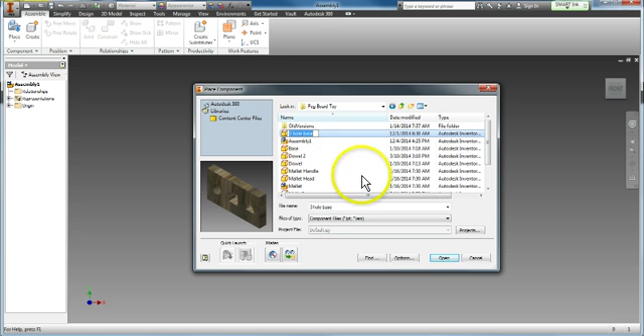So here's my Pegboard Toy folder, and I'm going to find my parts that I need. So I need a base. I'll double click on my 3-hole base and open that up. It's going to look really big, so I'll click one time and it'll zoom out. I'll click escape on the keyboard, and now I can zoom out and see I have my base placed.

After that, I'm going to go back to Place and find my side. I'll scroll down, here's my side piece, and open up the side. I'm going to place one over here and one over there, so I place 2 sides, then click escape on the keyboard.

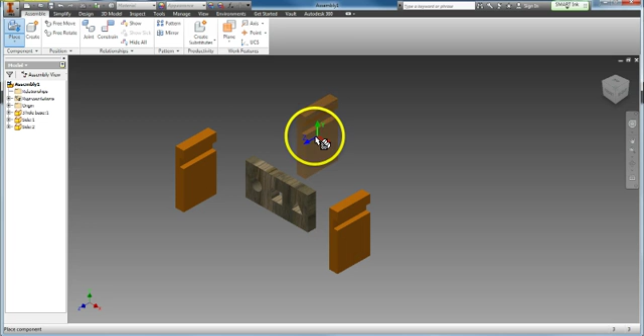Now I'm going to put those 3 pieces together. Right now you can see they move independently from each other, they're all different. To start, I'll click on the Constrain button up here. Constrain means give a sort of rule, a guideline to follow on movement, it's going to restrict the movement.

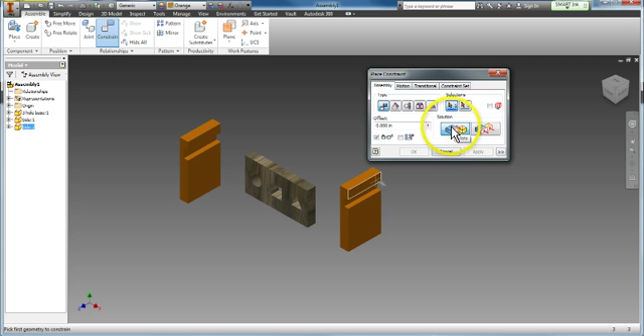To start, the first button I have here is Mate. I'll select the mate function, I'm going to call this the glue button, it's going to glue 2 surfaces together. So I'm going to glue the end of my board, making sure I click the end surface right here, click once there, then zoom in into the end of this notch. So those are the 2 surfaces that are going to be glued together. I'll glue them together, and then click Apply.

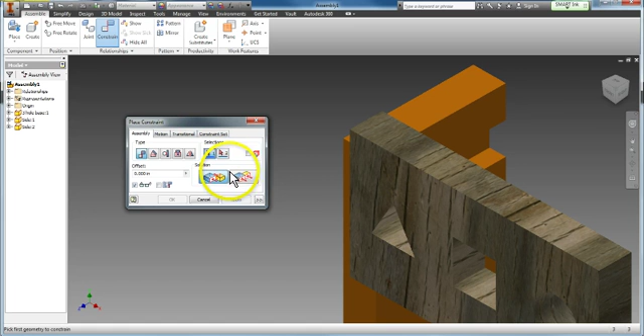Now it looks kind of funny right now, but that's fine, move it off to the side. Now those 2 surfaces are glued together. Next I'm going to select this option over here, called Flush, and flush means make 2 surfaces even. I select the flush option, and make even this long edge of my base and this edge of my side. Click those 2, click Apply, then close out of here.

Now you can see I can move this around, up and down. I can't move it in and out, it just moves up and down. It's constrained on those 2 axes.

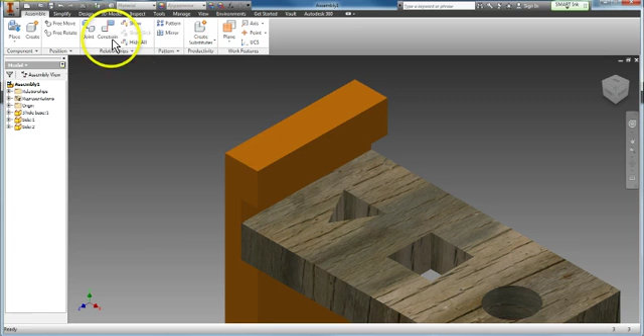Now, next constraint I need to do: go back to Constrain, make sure we're on the mate, or glue, function. I'm going to mate this top surface. I'll select my Free Orbit tool and rotate around very slowly, then mate it to this surface right here, that's where I want it to be glued to. Click Apply.

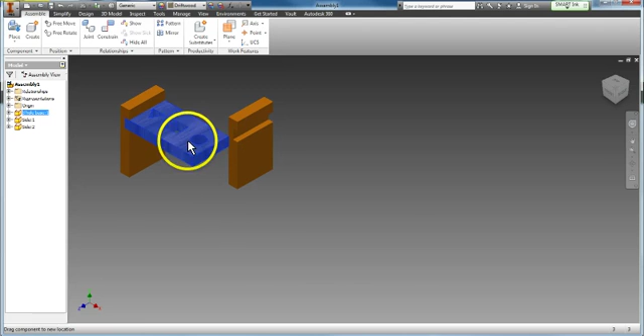I'm going to go back to my home view, and now you can see that when I move this, the base, the side, moves with it. So now I'm going to repeat that same process for my other side. Constrain, move that off to the side.

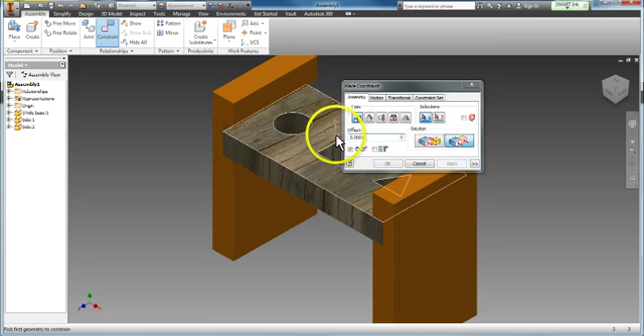I'm going to glue the end of this surface into this notch. Make sure you select that flat surface, do not select the edge. Select the flat surface, glue those together. Click apply. Flush tool. I'm going to flush the side of my side and the side of my base. Apply that, and now I'm going to move my base down a little bit.

I'm going to go back to constrain. I'm going to glue this surface. I'm going to rotate around with the free orbit tool, spin this up so I can see what I want to glue it to. I want to glue it to this piece right here. Click that surface and then apply. Close out of my constrain window, go back to my home view. Now when I move this, it moves all as one. Those pieces are constrained together.

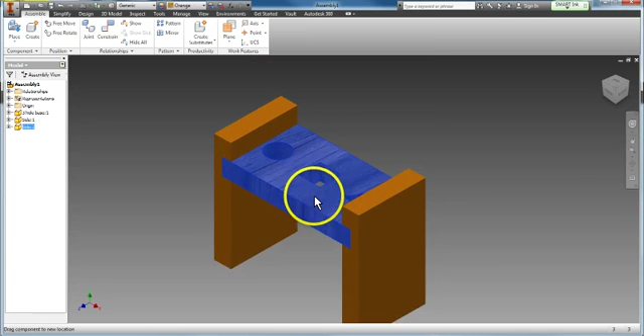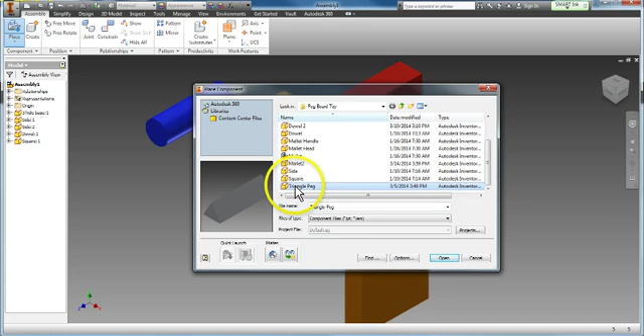Next step would be putting the pegs in. I'm going to go back to place and find my pegs. I'm going to look for my round peg, open that one up, and place it. I'm going to go back to place and find my square peg, place one of those, and then I'm also going to place my triangle peg. So there's my three pegs.

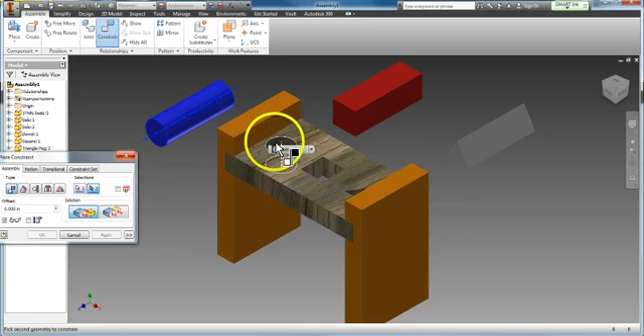Escape out of that. Now the round peg - I'm going to constrain the round peg to be in the round hole. I'm going to click constrain. This constrain is a little bit different - I'm going to constrain the axis. You can see that long, short line there, it popped up, it says axis. I'm going to click when that pops up, and then find that same axis in my hole. See the long, short line there? The axis. I'm going to select the axis, apply it, and now those two axes are constrained. Round pegs are pretty easy - that's the only constraint we have to do.

Now I'm going to constrain my square peg. I'm going to glue together - glue this surface to one of the sides of my square hole. Glue that in there, click apply, and now I've got to think a little bit. I'm going to move my square peg out of the way to figure out how I want this to be tipped up. I want this surface here to be glued to probably the surface I can't see.

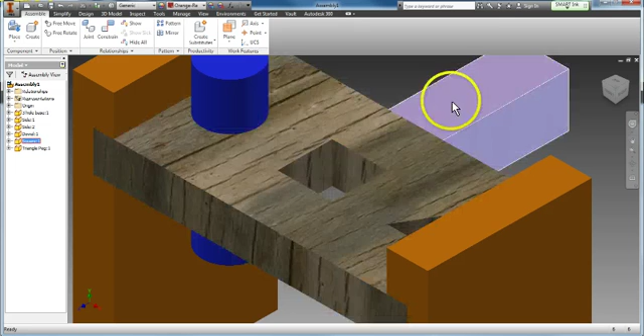So I'm going to click constrain. I'm going to glue this surface. I'm going to free orbit around so I can see a little bit, to this surface right here. So I'll escape out once, and I'm going to glue it to that surface, click apply. Now if I go back to my home view, that square peg should be constrained to move up and down and stay in that square hole.

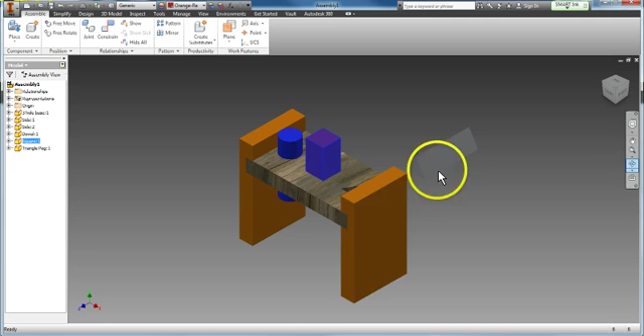I'm going to repeat that same process with my triangle peg. I'm going to free orbit a little bit so I can see the triangle hole a little bit better. I'm going to constrain this side of my triangle to this side, again the flat surface of the triangle hole. Click apply, and now I'm going to constrain this flat surface, which is a little bit harder to see, to this flat surface of my triangle hole. Click apply.

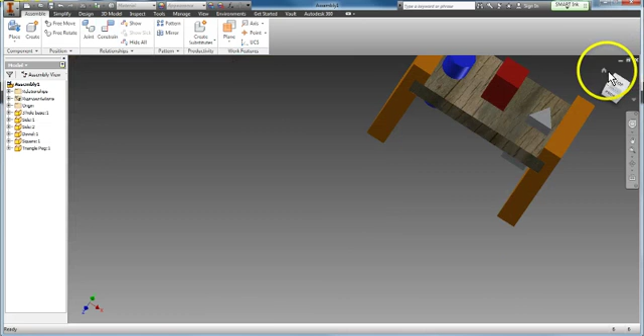Close that. I'm going to go back to my home view, and now my triangle peg should be constrained, square peg constrained, round peg constrained. They all move in and out of the pegboard toy, and the base is still constrained altogether.